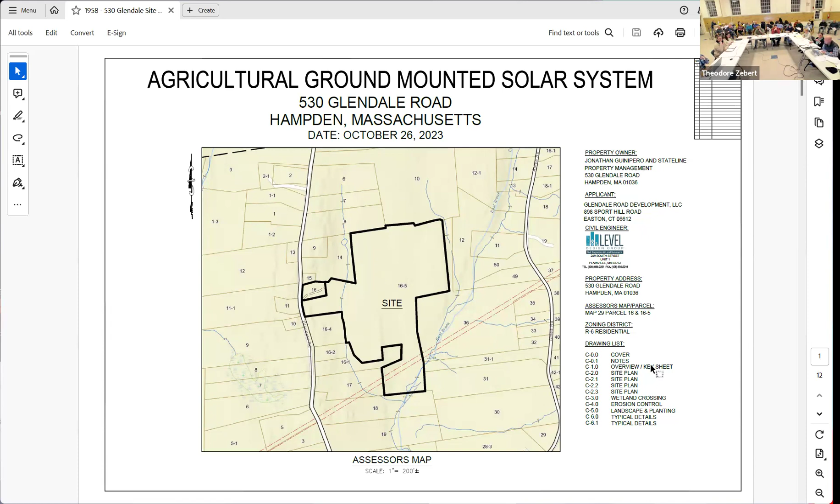So would you just like to go through it bullet by bullet? Yes, okay.

The first comment essentially is that these are in addition to the comments DEP provided in their file number notification letter. We're going to be talking about the one in the packet with Tighe & Bond in the corner, labeled NOI peer review, notice of intent. The DEP comments look like this one, which should be right in front of it.

Our first comment, based on the materials we were provided, is that the actual WPA Form 3 included didn't have a signature on it. So we recommend the commission get a copy with the signature.

The second comment under the bylaw is that proof of confirmation of coordination with other boards is required per section 7. If that was done, the bylaw notes the commission shall not take final action until such boards and officials have had 14 days from date of receipt of the notice to file their comments.

They've had a meeting with the planning board already, which will be continuing just like this one. Have you talked to Hobie yet, the inspector? No, ma'am, not yet. You need to do that, because he contacts you with any water quality things or other things you need. I'll make sure to do so.

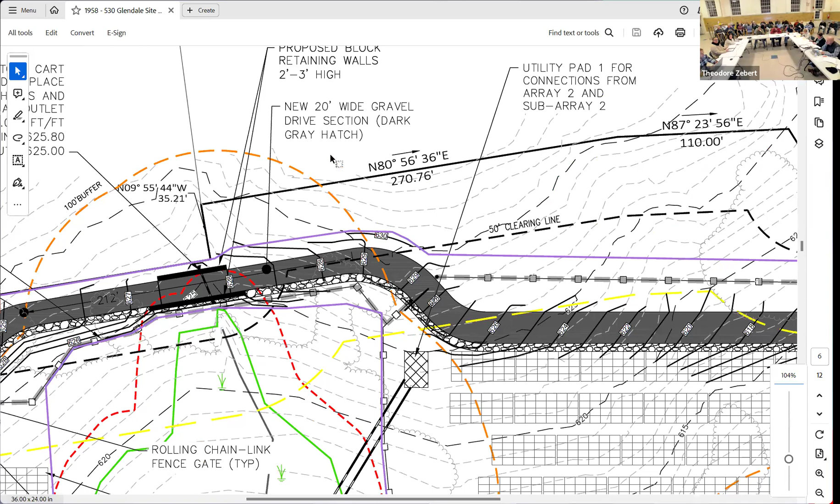Refer to excerpt from site plan C-2.2 below. This is, sorry, two lines. Thank you so much. No problem at all. 2.2 and up at the top. Right there. Okay, so a little bit.

So for this area, we added an extensive comment. We have serious concerns about the proximity of this to the property line and its effect on the homeowner.

We're asking for an additional delineation of the area that would be within that 100-foot circumference of the end of the wetlands there. You see that dotted red line? Because we need to know a little more about the stream and what's going under there and what's not.

We will obtain permission from the property owner so that you can, that wasn't done because the delineators couldn't really go over there, so it needs to get done. But I would note that it's within the planning board's clearance line, and it's very close to the neighbor.

Comment 13, provide a narrative addressing the BVW performance standards set forth at 310 CMR 10.55(4)(b), as well as documentation of an assessment of the BVW prepared in accordance with the Massachusetts Inland Wetland Replication Guidelines, second edition, September 2022.

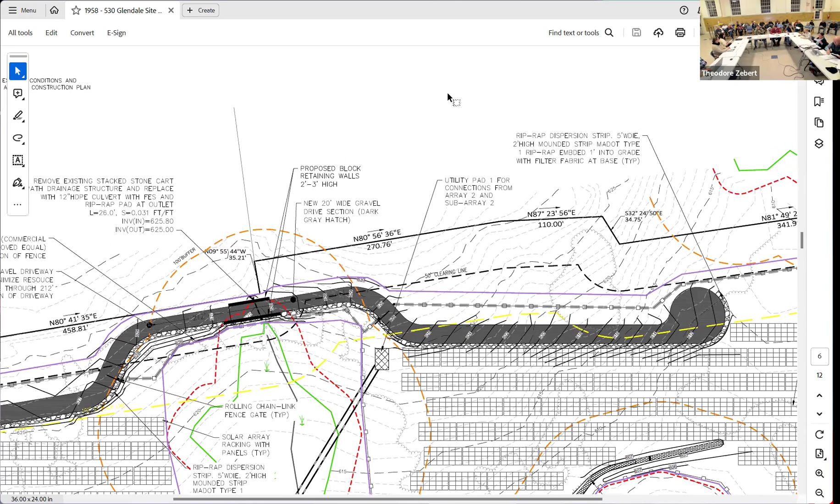If you look, it says stormwater on the February 28th letter. The reason why we can look at stormwater here is because the stormwater management standards are detailed under 310 CMR 10, that Judy previously described as being the all-encompassing regulation for wetlands in Massachusetts.

So the first 10 comments are going to be about the stormwater management standards themselves. I know that we don't give detail in our letter, so I'll ad-lib a little bit about what they are. Standard 1 is regarding discharges to a buffer zone, to a regulatory area under the Wetlands Protection Act.

It just means that we can't have untreated stormwater discharges that are erosive. So we're looking at, is there enough treatment of these discharges, and is it erosive when we look at actual calculations and numbers? This standard was met based on the information we had.

I will note, because there's been a lot of questions about it - what is the wording they use in there? Toxic, Total Suspended Solids, TSS - all of the things that they can't be emitting into the wetlands. They don't include animal waste and nitrification. We have to deal with those in other ways.

Because that was my first question, how come? But in fact, they specifically name the kind of industries that have dangerous output, and it doesn't fall under any of those. Right. We can get into that in a little bit.

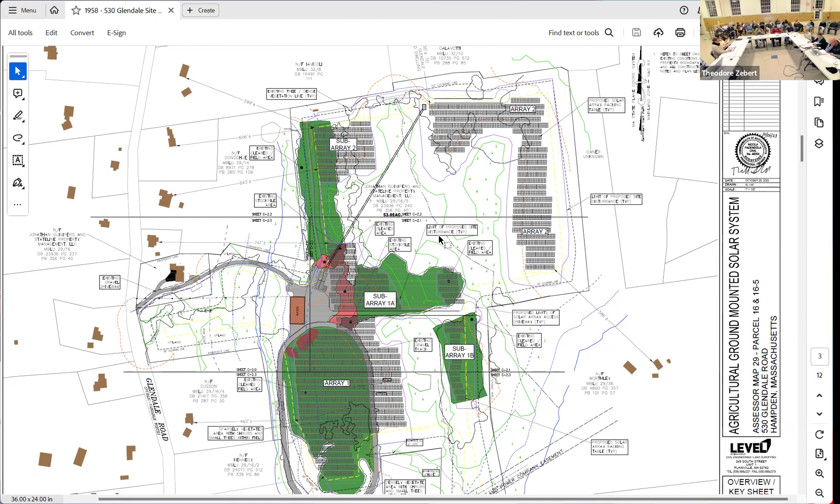Number 14, starting here, is when we get into a whole bunch of real technical stuff with our analysis. The first one is regarding the riprap swales. Where are those? They're on the side of the road. The one I know of is on C 2.0 particularly.

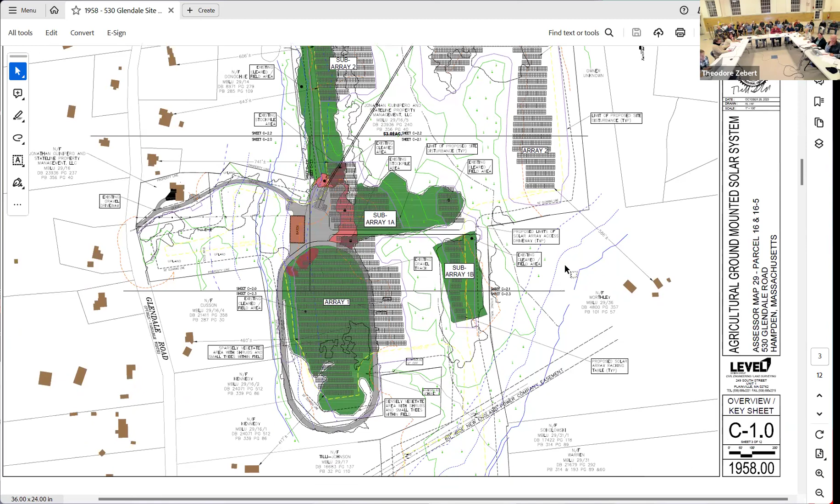And then there's a detail on 6.0, I think. So 2.0. Yes, please. It's right in that top right-hand corner on the side of the road, east side of the driveway.

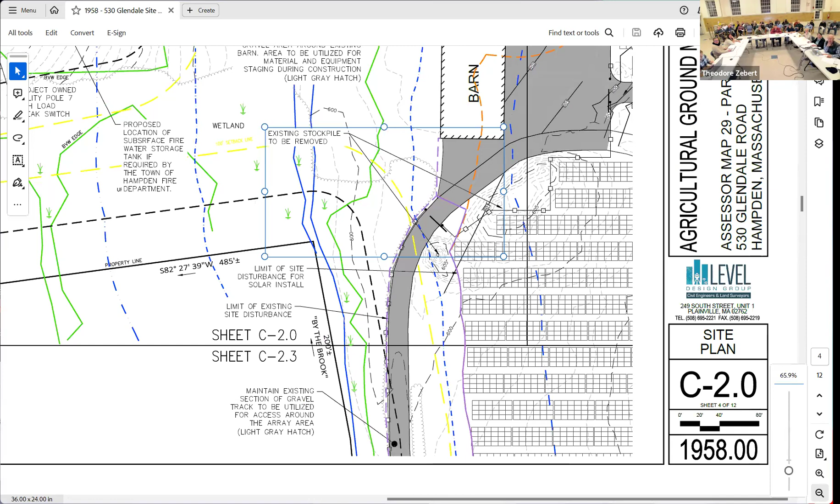This is what you're referring to, a little dot hatch right there. Yes, you see that little honeycomb patch along the side of the road? That's the swale. So that's what these next comments are about.

The detail on sheet 6.0 indicates a triangular swale, a V shape, but the contours are depicting a trapezoidal shape. We just want to clarify which one it is.

And then B, the grading of the swales is representative of the trapezoidal depression we mentioned, but that is including the roadway. This is a challenging comment to get across here.

So it looks like to us, the bottom of this channel as shown on the plans, the honeycomb hatch is the swale. It looks like that's just the bottom of the swale, and that the swale actually is in part of the roadway. We'd like to see it completely separate from the roadway. We don't want to see the roadway eroding. We want the swale and any channelized flow in the actual design swale.

So we'd like to see that topography changed a little bit to further define that the swale is separate from the roadway, that we're not getting flow. The idea would be if it filled up too much, it would be flowing along the road if it was full enough. We want it to be away from the road. So in all those words, that's what that really meant.

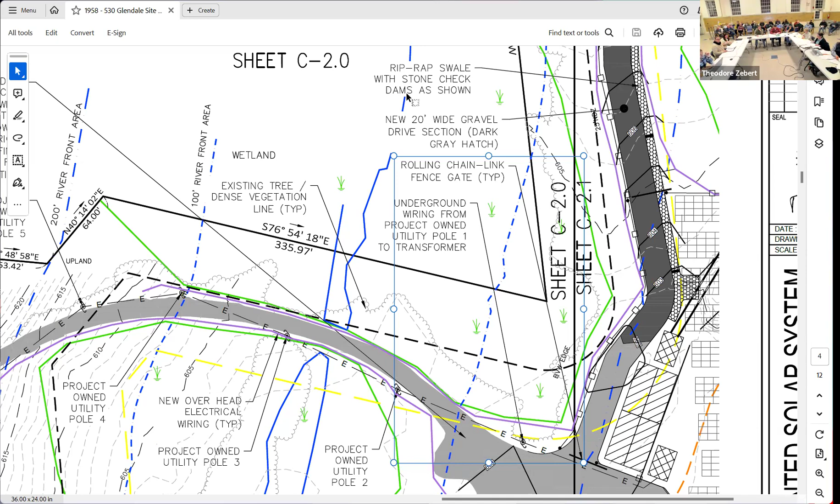And the things that we added: we asked for more details on the other stream crossings. There's one in the center of the project, and whether that maybe should be a stream crossing rather than a culvert, as well as the one that we were just looking at before that's near the property line.

I always get very nervous when there's huge trucks crossing a culvert, because we've had so many collapses in town. I would rather see something that I know is going to stay there and not collapse. Even if there's not a fast flowing stream now, given the kind of storms we've been having, we are certainly going to get a lot of runoff through this area.

The high point of the whole property is in the northwest, and the low point is toward Eastbrook, so everything essentially wants to flow that way. Any flow that builds up where those roads are will probably have to cross under them, so we want to make sure that doesn't back up on us.

We asked them about the clay horse track in terms of impervious surface. Any of it that's left has been there now and driven on for a while, and it acts pretty much as an impervious surface. I noticed the soil in that area is also not very pervious, so we'd like to rethink all of that.

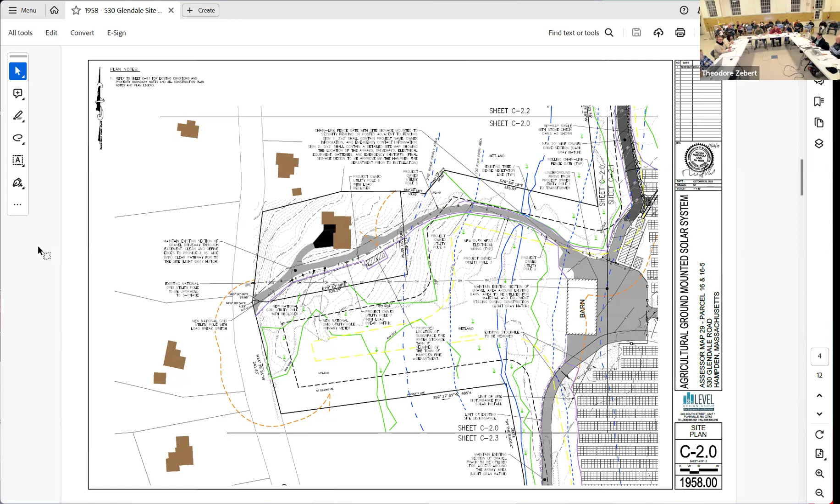I was just curious whether it was going to be in that particular area or all the way down the driveway. Yes. Was it in that one area they were concerned about? It seems like there's wetlands right there.

So that's the only area Tighe & Bond's concerned about, not the area where they're proposing the fire storage water tank or anything like that? Nope. Okay, so Tighe & Bond peer reviewed the ANRAD that was filed, so in that sense the boundary as shown on the drawing here was confirmed as the wetland boundary.

Okay, that was one question I had. How about the north side of the driveway up there? Is that still, was that part covered in the ANRAD? I would have to go back and revisit that. There's no wetlands up there, it's 20 feet higher than where the wetland is. But is the intent to close that wetland? Yes, we'll get that flag. Okay, probably hang that. That was one more question.

I've had a couple questions, of course. Tighe & Bond's comment number 9, the provide concrete and material washout area detail including proposed protective measures - where on the map was Tighe & Bond talking about? Were they talking about the basins or the transformer pads? So clarification, anywhere there would be a concrete truck - presumably at this location - there's no information on those trucks, they tend to get washed out on site. So we're asking that the locations intended to be managed be provided. Okay, I was confused on that and now that makes sense.

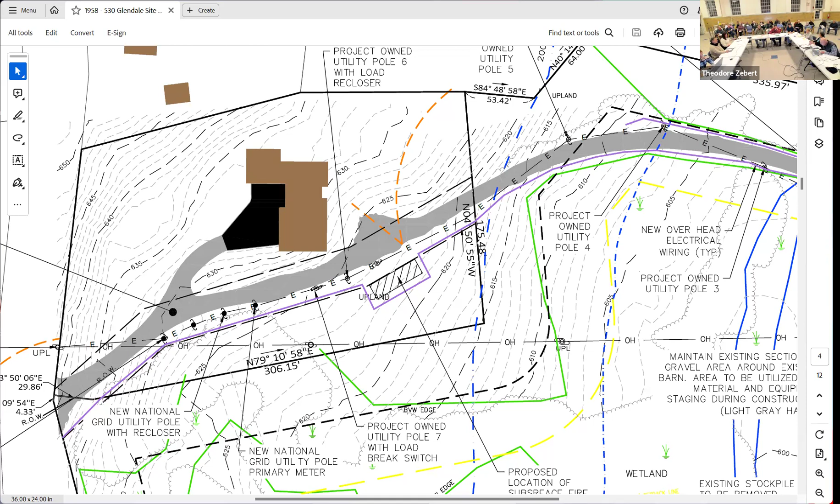I think there's enough degraded area in this property, like for instance, that river, that if they were to do a restoration project, that might count as some of their mitigation area. Get that on the plan. That would come way at the end.

Judy, so for wetland disturbance, we have a replication plan. We're replicating within 100 feet of where we're proposing. I think it's like a 69 square foot wetland disturbance, very minimal, right there where the two green lines kind of V in on each other at the driveway. So it's very minimal disturbance.

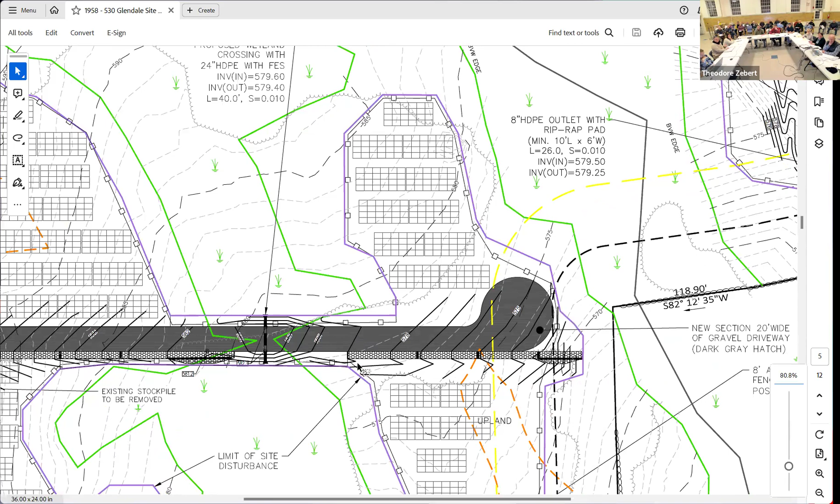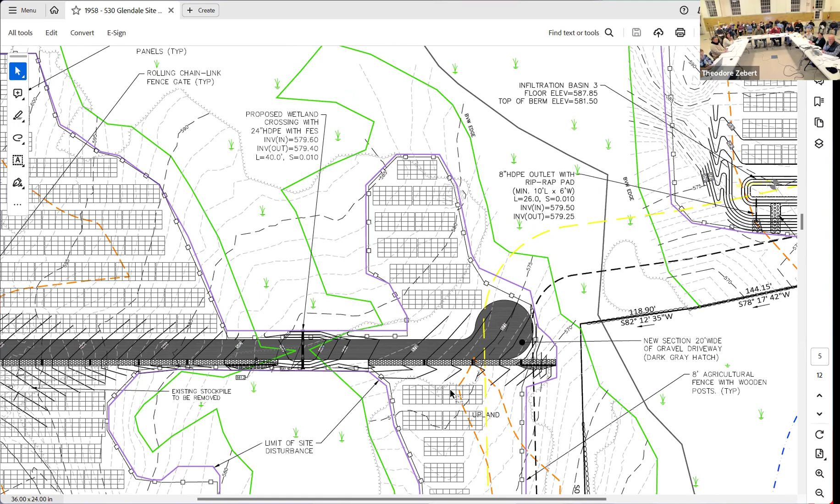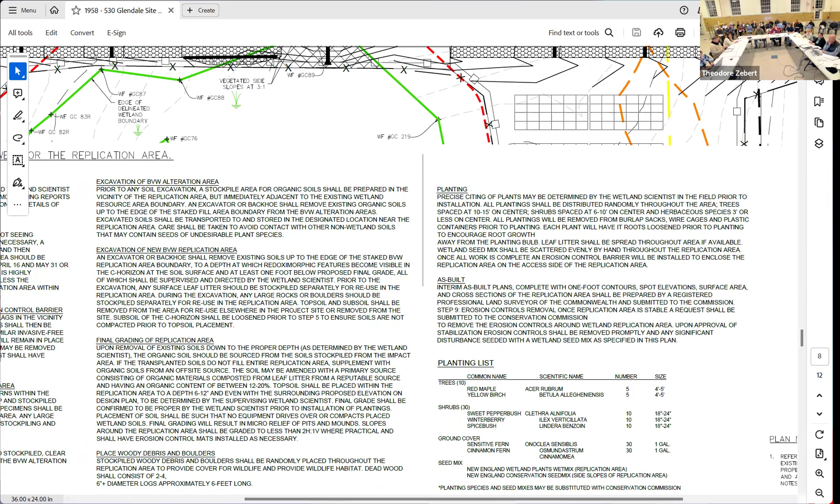So detailing plantings, the area procedures that need to be followed during the restoration process, monitoring, all those requirements that go along with reestablishing a new wetland area as required by DEP.

What Judy was talking about was restoring riverfront zones, where we asked to do that in lieu for credit for disturbance of other areas. And that's something we would consider, if that's something the commission would like to see, to allow for placement of panels in the already disturbed zones, like the interior track area where it's already a grassed area, where we're proposing panels. That's a prime area.

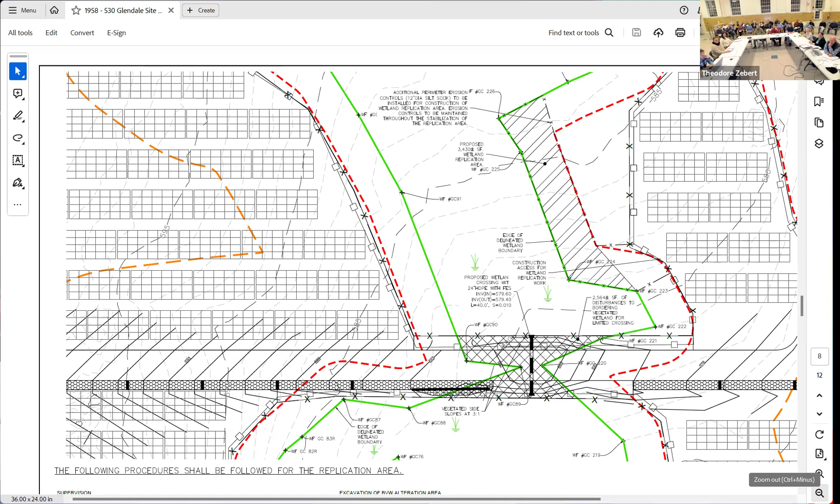We're not cutting any trees in the riverfront zone. So we do have some areas we could look at for restoration, which would be located for the main plan, along this area. One more. Zoom out one. There you go.

So in that top left corner, we have our new driveway that we're proposing, that's in the riverfront zone, but to the left of that area, all the way up to the property line, is currently fields and things of that nature. So that is an area that could be slated for riverfront restoration.

And I believe a portion of that is within 0 to 100 feet from the high watermark of the delineated stream in that zone. We would also maybe consider looking at some restoration in the area of the track.

Our thought with the track and utilizing that area for an access driveway is that it's solely for routine maintenance of the facility. So that's not construction, we're not going to be utilizing heavy trucks there. The area will be driven on by equipment, so that area doesn't need to be graded, it doesn't need to be cleared.

It doesn't need to have a lot of earthwork, like say the right side of the property where we have vegetation, you have to have logging, clearing, grading, installation of a stormwater basin. That area is solely installation of the racking tables for the most part.

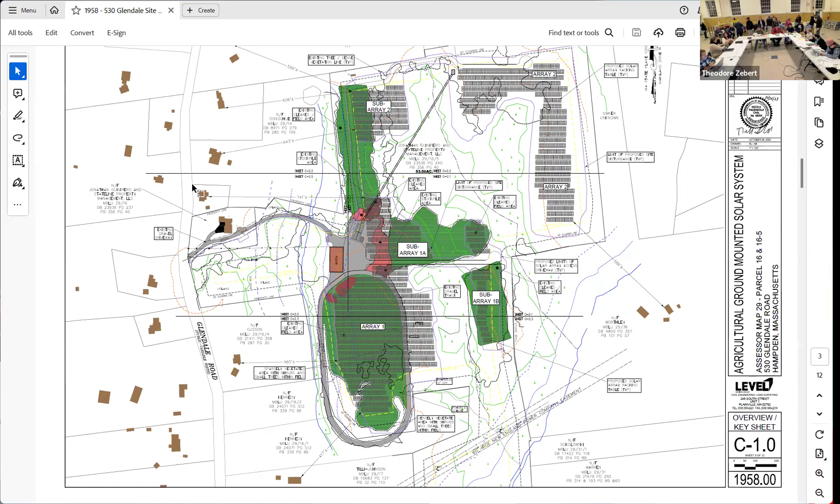So we're gonna need a signature on that. Do we need to sign it? Wait a minute, I will hang out, I'll give you one. Awesome. Do we need to sign it? Yeah, it's just, always forget. Everybody have to sign that? Yeah, okay, not a problem. There's two, one for Rory to take. I wanted that in there. Oh my God, but this application.